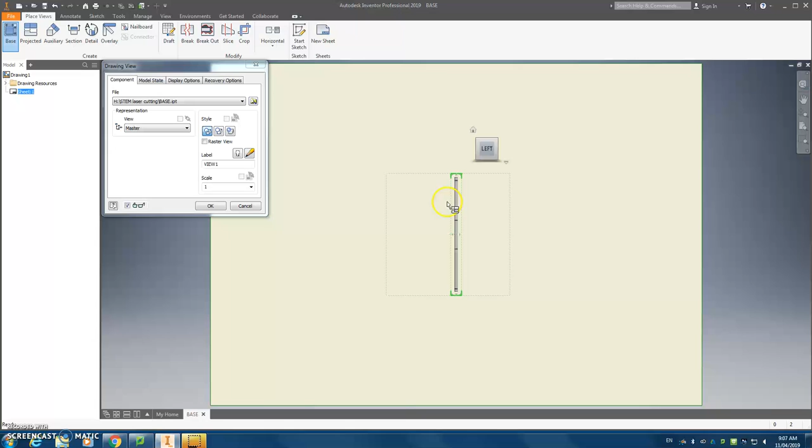Okay. The other thing I need to make sure of is that I'm looking at it the right way around. If your view came in like this and it was showing the side view, you just need to rotate around your orientation cube until you've got the flat front-on view. And then once you've got that, press OK.

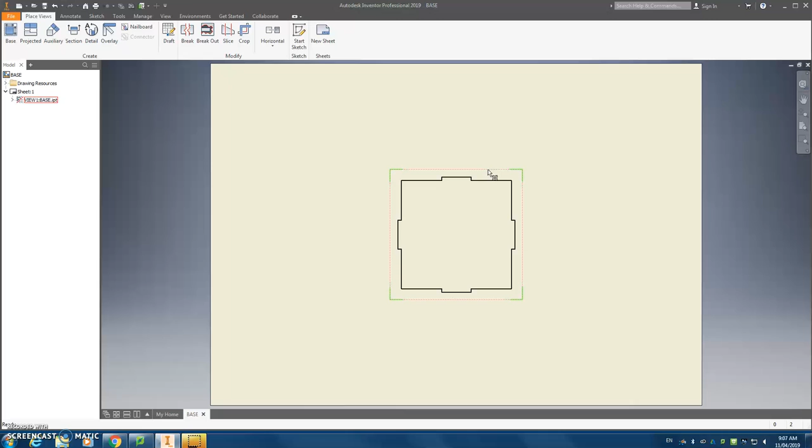Then we just need to arrange this on the page so that when we actually cut each view out, we're not wasting material. So I'm going to move this. So as I hover over it, you can see the red dotted line appear around the outside of the view. I'm just going to click and drag and move it close to the top left-hand corner. Okay, so I've got my base in there.

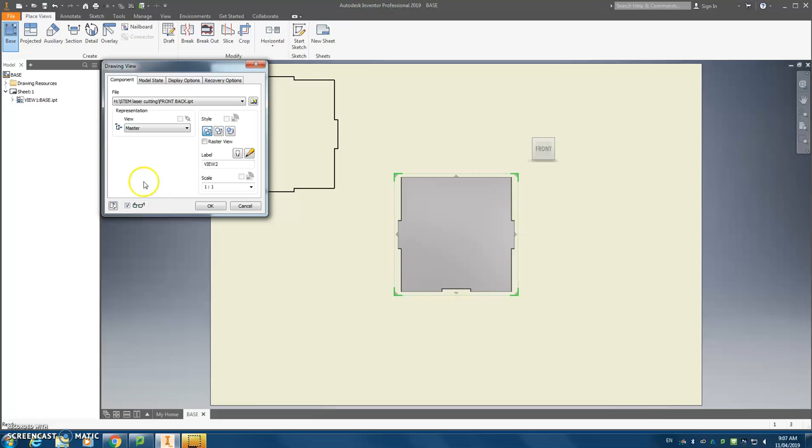Now I'm going to go back to base. I'm going to go into my file, and I need my front back piece. So that's the right scale, it's the right view. I'm going to press OK, and I'm just going to drag that very close. So I don't want the lines touching, but I want them to be very close to each other. And I actually need 2 of these views, so I'm going to go back into my base and place another one of those in. And just arrange it on the page there.

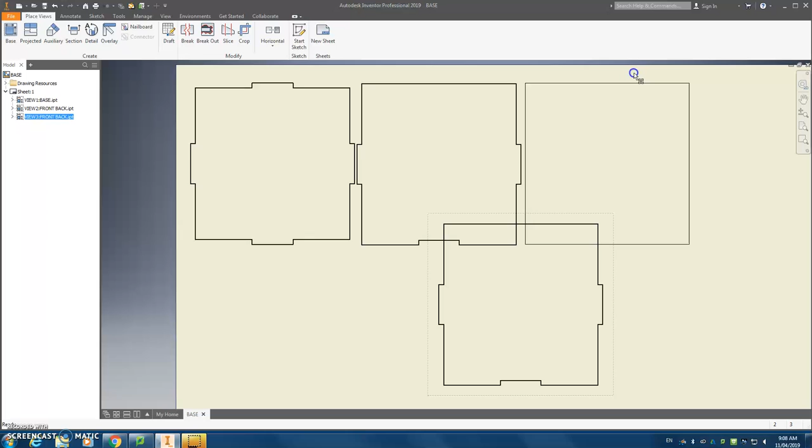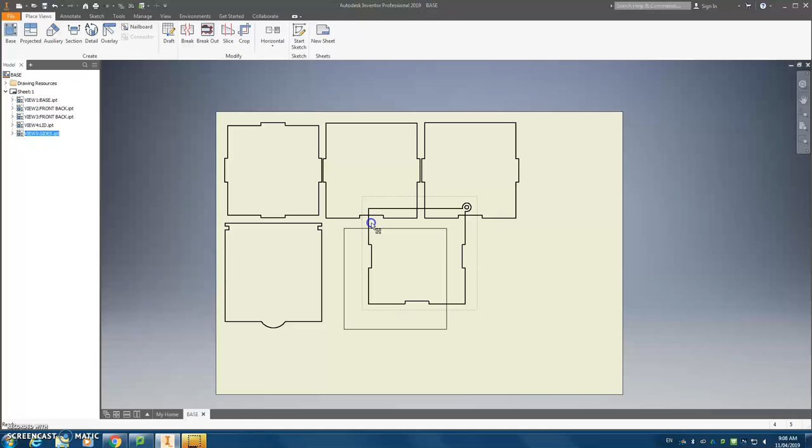Okay, so now I'm going to go back into my folder and have a look at what else I need. I need 1 of the lid pieces. Okay, that's the right view and the right scale. And then the last piece I need are my sides, and I need 2 of those. So I'm just going to place the first one in, arrange it, and then go for the second one. So sides again.

Okay, now that all of my views are in and I've laid them out so that they're all sitting fairly close to each other, I could potentially move this one up a bit just to close some of those gaps. But that's looking pretty good where they are now.

Okay, so the last thing I need to do is go File, Export, PDF, and then I just need to make sure I'm saving it in my folder, and I'm just going to label it Box and save.

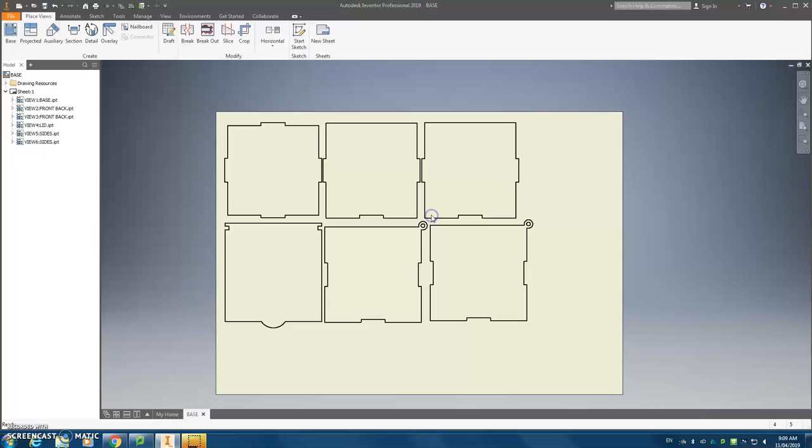Once you've saved that PDF, so if I just go into my folder and I'll just open it up, you can see that that's my PDF there of my box parts. You just need to email me that PDF file so that then I can send it to the laser cutter. And that's all you need to do for that step.